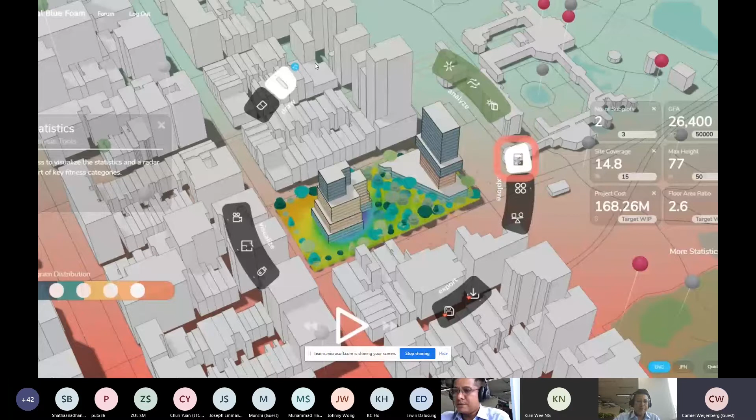Super. So how do we leverage innovation and rethink place and process and face new challenges? So this is one of our core questions in our Digital Blue Foam business: how to embrace innovation and rethink how we work in architecture and building industry design.

So the next 20 years, as most of you know, 2 billion people will be moving to an urban environment. They all need to work, live life, right? So they need to shop, work, do their entertainment, etc. That is a lot of city that needs to be developed. It also needs to be developed in a more sustainable way.

As you all probably know, 39% of global CO2 emissions are coming from the AEC industry, which is ridiculous and it needs to change. We have about 10 years left according to the UN, and the way we are developing now is not a sustainable way yet.

It's not 1982, and some of you might question why 1982. 1982 is when, probably shouldn't mention any names, but certain CAD programs were launched, and they were based on using a mouse and a keyboard to draw lines. We still work like that predominantly in most of the firms.

What we're proposing is to work with a responsive solution that is online and where you can compute solutions based on data. So we rely a lot on what the computer can do, and we rely a lot on what the architect and designer want to do. And so we fuse computer generative design with how people work and design in spaces and cities.

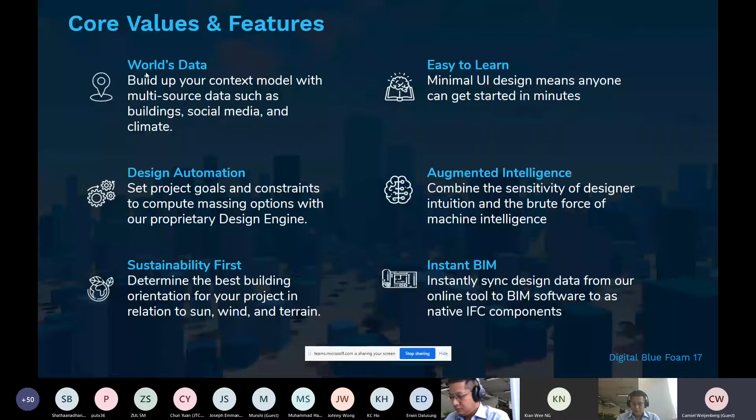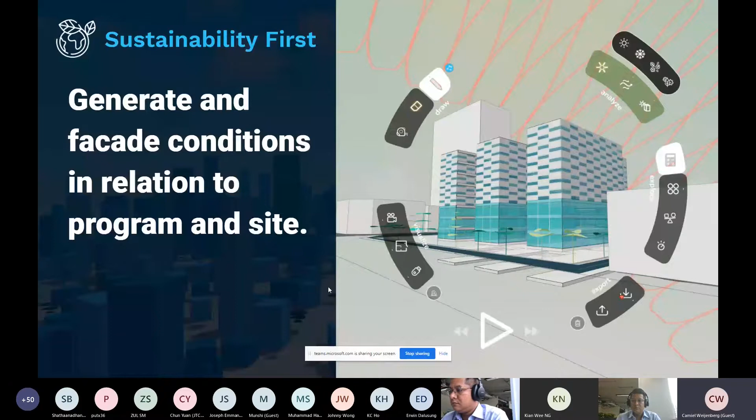So we can also work with external data for some of the sites and locations. And we have a sort of heat map to show where there are very popular restaurants, very popular hotels, etc., to maybe help you determine a certain walkway or entrance point for your building. Again, all we want to do is bring data to the design process and assist designers.

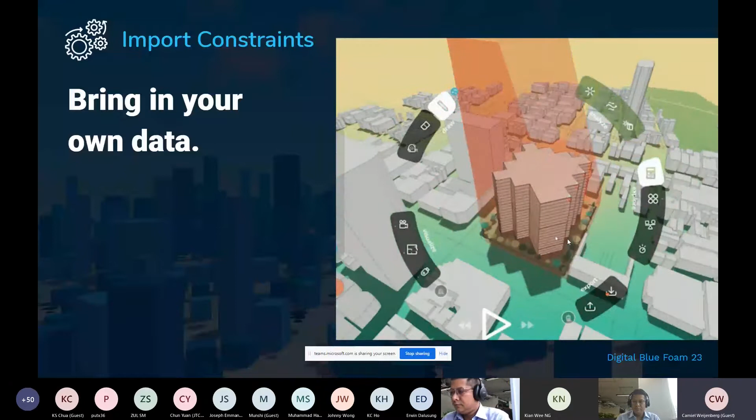We also work with some of the main file exchanges, so you can bring in your own constraints for the site and work with limitations that are based in planning. So you can have a certain setback in an angle or height limitations, and the tool will show immediately if you are in or outside, and you can therefore make instant adjustments to your building, and that will reflect in your GFA and all the Excel sheets that come out of that.

So one thing we're really proud of is this pen tool where you can mark your site and it will draw the buildings, or it will draw a road, and of course different conditions and information can be given to that.

We've got quite a fun, imaginative tool. So on the left you can see this sort of beatbox mixing for your music station, and this was actually an input from one of our clients, and we've taken this challenge on, and we made this mixing board where you see these different shapes of squares, the C, and these different letters. So these can be marked on the site. It will populate the site according to your GFA and which typology you highlight.

You can then offset the building, and you can offset cantilevers in terms of shifting the building or having a side offset. So it's quite a fun and intuitive way of exploring different types of building typologies for your site, and maybe to discuss with your client or just with your team and see what you think is a potential solution.

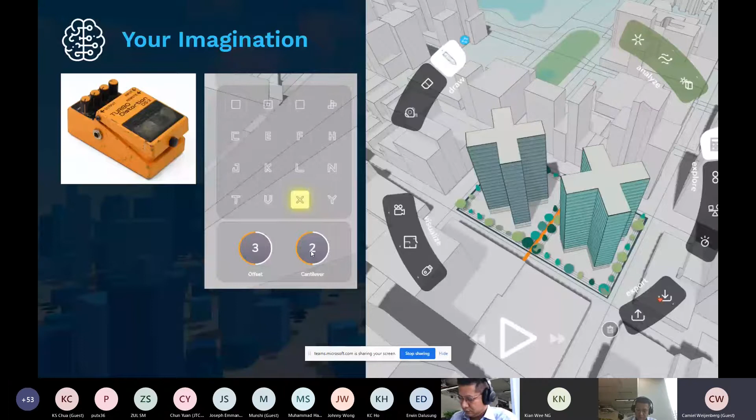Like I mentioned earlier, we've built a pipeline to existing workflows. So we're very strong in these programs where we build an Excel sheet directly from our tool that you can download. You can go to SketchUp. You can, of course, go to Rhino, and you can also go to Grasshopper, but not necessary. And you can go directly to ArchiCAD. Inside our tool is a way that you can test your site and show different types of options and compare them on different efficiencies or what kind of program you have in the site.

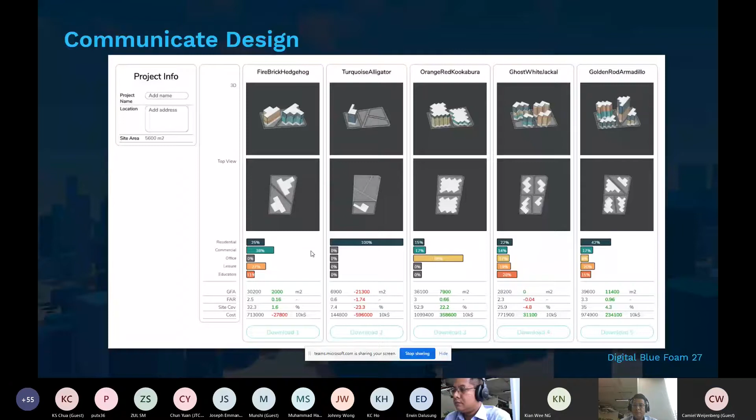Hi, Camiel. We can't seem to hear you. You need to unmute. Is that since the beginning? No, no. Just now? Yeah. You can continue. Okay. Shall I go back a little bit? No, from the ArchiCAD. Yeah, okay, great.

Great. So here in the middle of the screen, you can see the online platform, and on the right, you can see ArchiCAD, and it's syncing the data instantly to ArchiCAD. And these are native components. So floor slab is actually floor slab, facade is facade, etc. So you can manipulate directly. You do not have to redraw it.

You can if you want, of course, but you don't have to. And if you want to try a different option and bring that into ArchiCAD, you can resync it and it will come in again. You can just see it rebuilding the model. And there you go again.

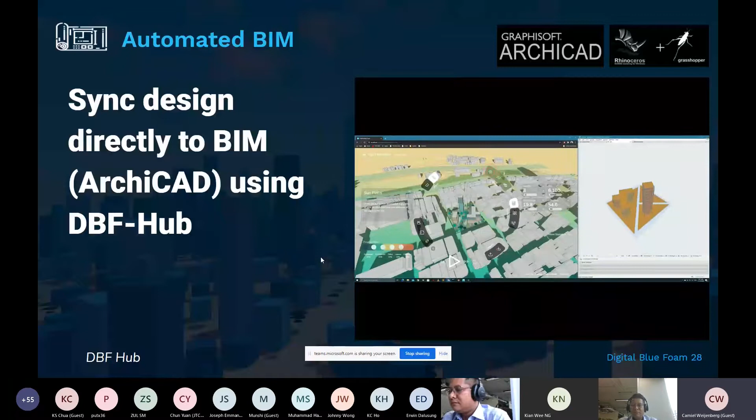So what we're really trying to do is make the design process obviously a lot more fast, but also well informed. So people make decisions on data and can quickly test these with their team and just see how that can evolve for the site.

So we have a very hands-on way of working with our clients. We have clients in an enterprise account where we work with them in a very agile way of developing the tool further. So we really sit down with the team and say, okay, we have a really big bottleneck in how we work here. How can we address that, and how can we make that easier with Digital Blue Foam?

And therefore, we adapt and validate very quickly in a 2-week cycle. So it's not every year or every 2 years that there's an update. There's typically an update in our software every 2 weeks to 4 weeks, depending on what we are launching next, of course.

So I'll do a short demonstration. I had it open, but let me check. Yeah, there we go. So this is our landing page after you've logged in, and you can just type in a location and click enter. Maybe here is quite a good site. So I'm on my laptop. Okay, so let's click on this site.

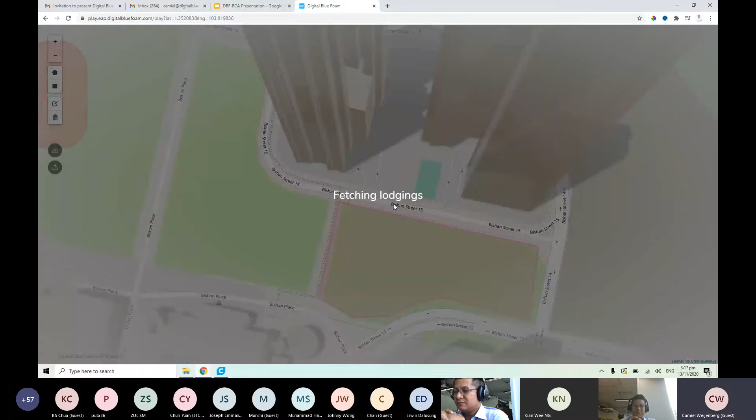And actually I want to edit it a little bit. So I'll just go edit. I change it maybe a little bit, and maybe I want to move this one out. So I say, okay, let's confirm. Let's save that. And it will load the site. So we start bringing all this data into our native environment. Here you can see it's a top view of the site and it has built this in a 3D environment.

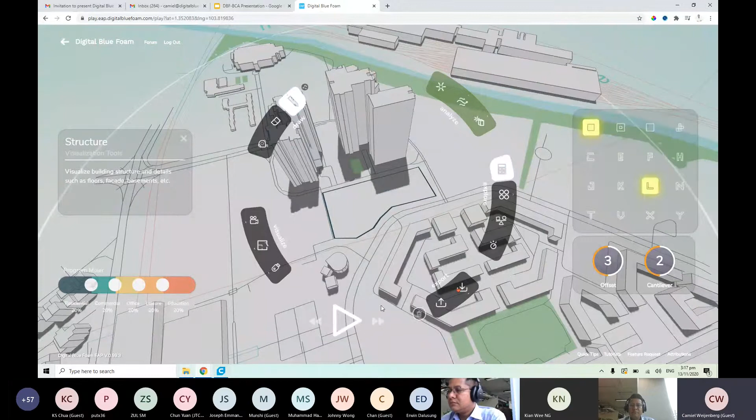And you can say, well, maybe we want something quite high and dense, just like our neighboring buildings. I want to keep it very simple. I just want to have some straight blocks, maybe an L shape. I'm okay with the offset, and then I just click run. And for now, I'll just take a nominal area of the site.

And actually there's a little road across, so maybe I want to draw through that, right? And maybe another one just here. And then I click check again how that comes out. Maybe make this 6. And then we'll start to generate more options from that.

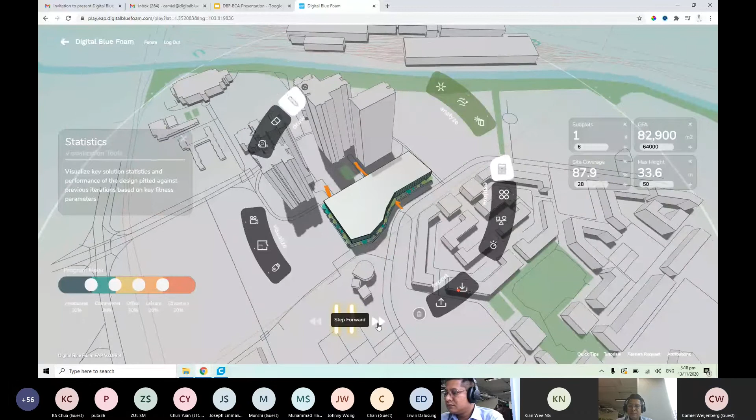Right. It is doing it. I'm not entirely sure why it's so slow. Maybe because I'm in a call at the same time.

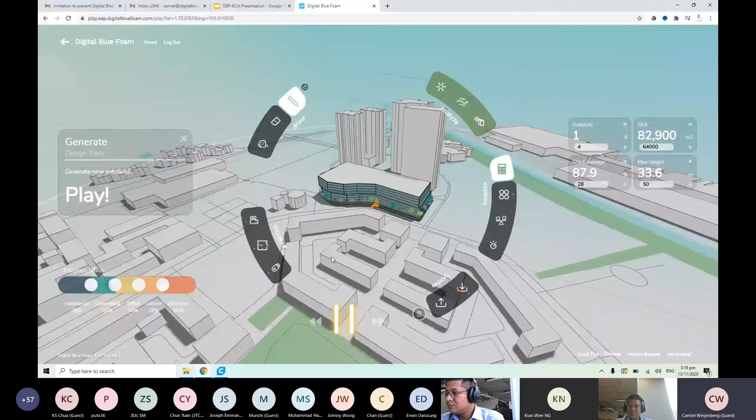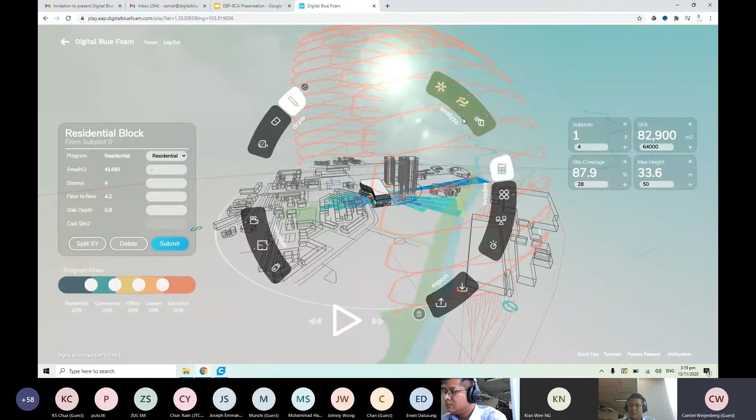Maybe I'll stop that. As you see, it's quite a large site, but maybe I'll just show you how these wind directions work. So here we can see how that wind comes through on a 10-year average. You can also see how the sun develops. In Singapore, of course, it's quite vertical year-round. But if you go more to the northern or southern hemisphere, it's much more angular, and you can work out your shadow casting from that.

And of course, if you click on the sun, you can change these dates quite simply. So if you want to go to January, it will update that and it'll run again. So let me just try this site again.

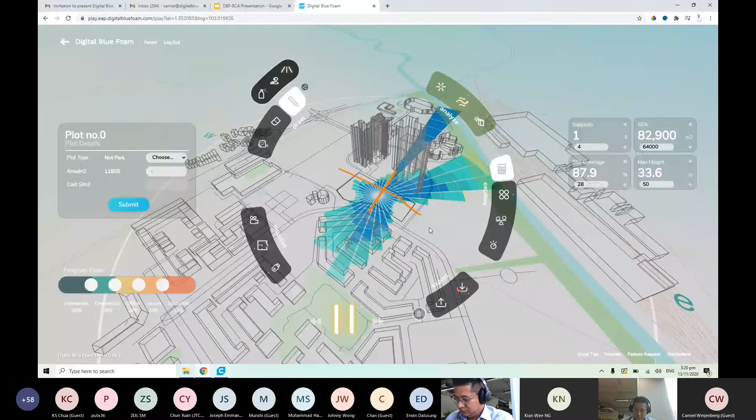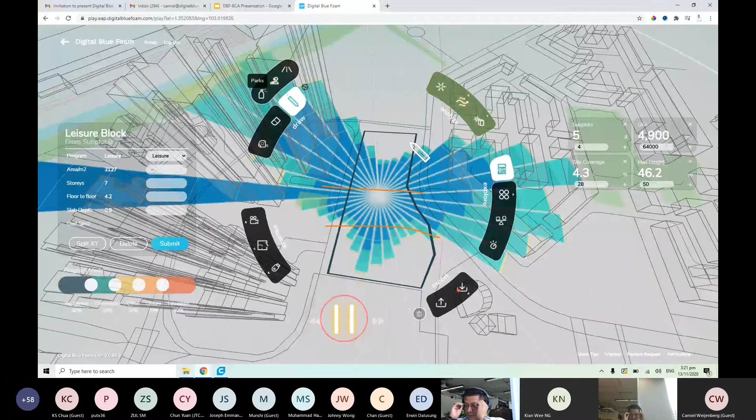So you see it starts splitting the buildings, and actually you can then just save your options. Maybe try more. Actually, I don't think this line is very successful, so maybe I'll just remove that. Maybe you want to try another one, right? Let's say you want to have more in this direction. And maybe I want to have a park there. So we'll generate accordingly. So you see, maybe you want to save this one as well.

I quite like that. So it's a very playful tool, and so maybe I want to have this one, I want this building a lot higher. So instead of maybe 2, I make it 15 stories, and I make it residential. I can change the floor height to 3.8, submit. Oh, I clicked plus by accident. So actually

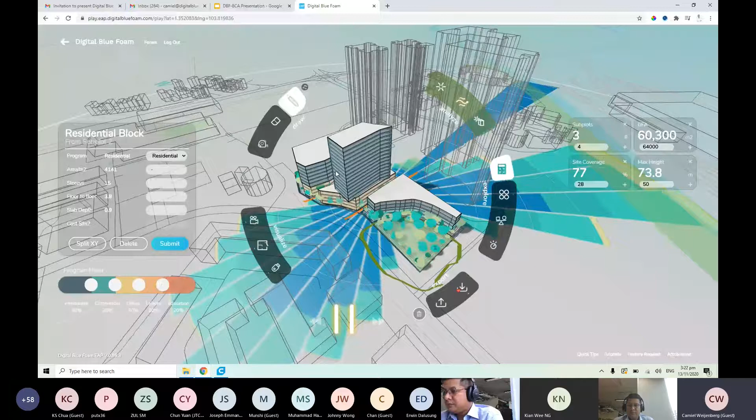with your arrows, you can rotate the block, or you can scale it. And you can rotate it with left and right. And so maybe I want to save this one as well. So maybe if you tried a couple of options, I'm going to shift this one a little bit in. Maybe I want this to be leisure, and on a very high floor to ceiling. So I would like to save that.

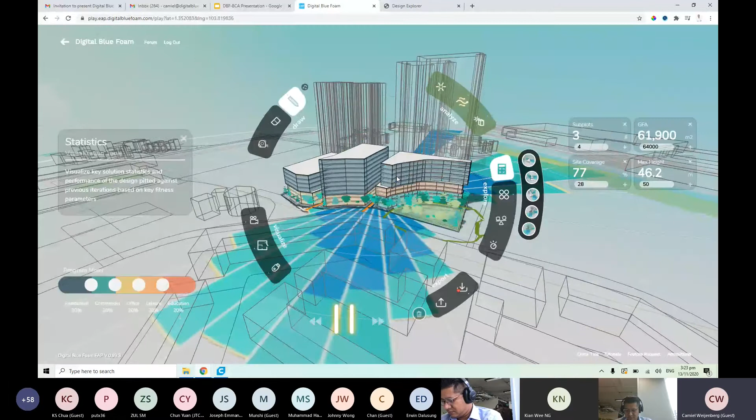So then once you have these, you can say, okay, you've got 5 options. I maybe want to have a quick compare of how they're performing and what areas are in them. So here you can see that these are the typical sites that you've just created. And from there on, you can go back to the tool maybe, and you can manipulate them further. So you can just click on them and it will reset it. So you can maybe make this 7 stories and submit.

So we tried to create a very intuitive tool, and then here you can see the download buttons and upload buttons, and synchronization if you have ArchiCAD open. And then here's some options for turning on trees, and here's some drawings of plan sections and all that you can derive from the site. And then here are some layers and urban information that you can turn on. That is nice to see here.

Yeah, sorry, my internet connection seems a bit slow with the meeting on at the same time.

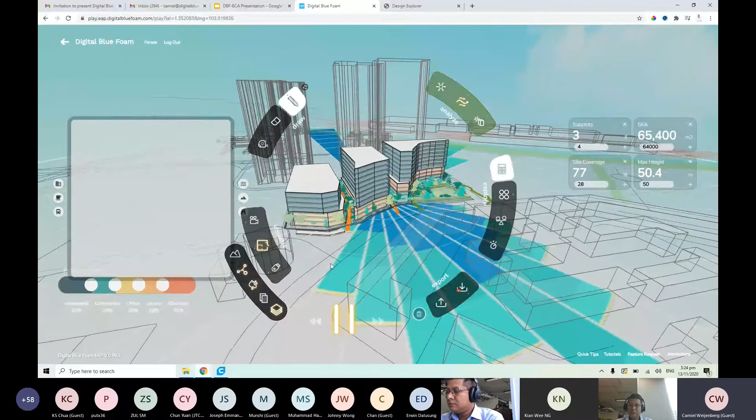But I think that gives a very good overview of what we're doing. And again, we always look for feedback from customers and improving, but we're very confident in this tool.

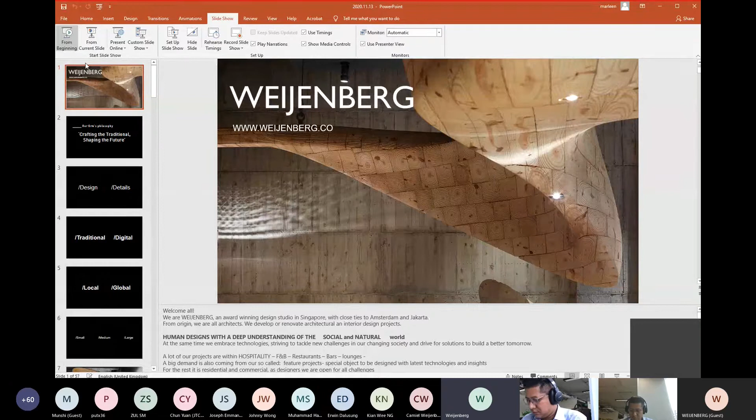Okay. Right. You may start. Welcome all. Thank you. Go ahead.

Crafting the traditional, shaping the future is our firm's philosophy. And this means a lot. It captures almost everything what we like to be, what we like to carry out. Without a past, there's no future. Without a past, we can't invent a future. We need our knowledge from the past to develop the future. The past gives meaning to the future, socially and emotionally, which is a very important aspect. So we should never neglect the past, since then the future would be empty. And so we can go on and on.

Design is more than shapes and forms. It's more than a choice of just materials and structures. Design is about what we think is about being a change maker. We're striving to get the best out of people. We try to create a space that enhances us as human beings, where we live and where we work the best. It gets the best out of us.

Design can evoke interaction, it can evoke imagination, it can be critical. So design is way more than just some nice colors and some nice material all put together. I think as designers we should, and we are almost obliged, to help this world to a better future. Of course, details are incredibly important and show the way we care about our design and about everything.

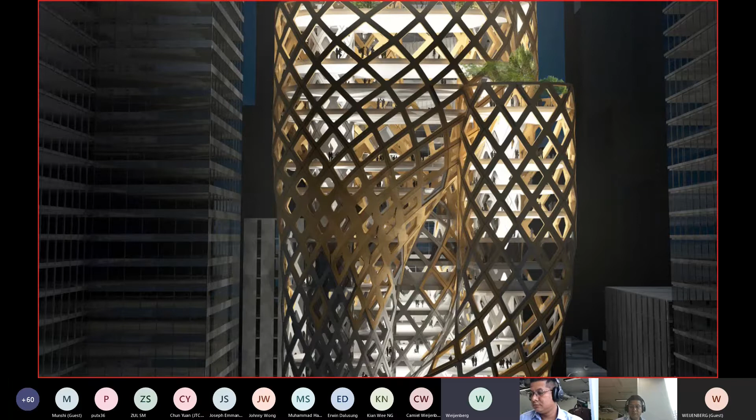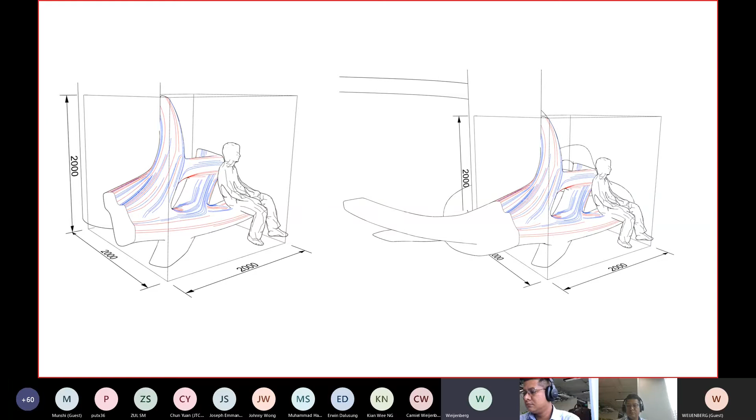Because this location is on the 15th floor, if I'm not wrong, we have to think about how to bring this object up. So we make the object in parts. We slice it so it fits into the lift. And this is the small detail that we try to focus on. Also, this is brass inlay on the wood. You see here how two parts are joined together.

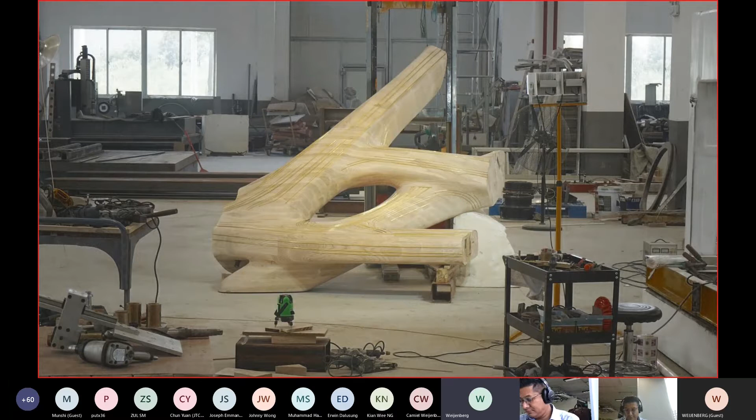How this works, basically, we glue together small blocks of wood and we CNC, and after that smoothing with robotic arms and manual workers. This is one of the parts in the workshop before installing. This is also the detail. From the block of wood, we also try to manage the exact location for the inlay that you see here, and then put all of the information to the fabrication, and they will fabricate it.

As I mentioned before, the idea is to capture the flow of the wind and how the money comes and goes. So we also design the floor inlay layout. Each floor has a really different pattern. So we try to design that. We try to help the fabricator to fabricate this with the exact design.

After finishing that project, the clients were very happy and they asked us to also design another office in Hong Kong. This is in Bank of China. The rent price is so high, and they want the project all done in at most 3 months. So we were really going at a fast pace. We design and send to the workshop, and then they give us feedback. So this is really back and forth design and refinement.

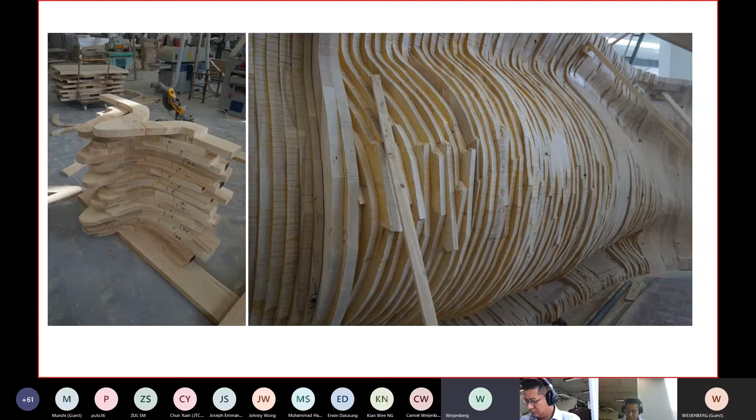As Marleen mentioned before, we try to combine the traditional and the future. So we use wood as the main element in this office. The idea is using strip wood. We only do simple CNC on parts and glue them together, and after that we smooth it. These come in small parts, like 2 meters high and only 1 meter wide, and then they are joined together on site. This sample shows how they use the robotic arm.

So we also think of the walls not only as a division between one room and the other, but how to integrate them with the furniture like seating and so on and so forth.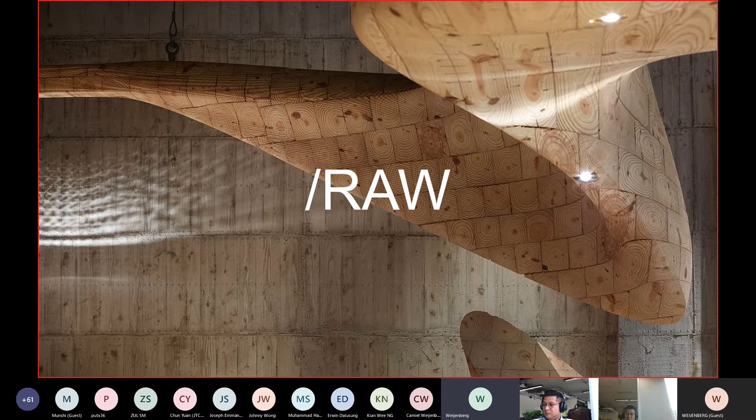Another project that we did here is RAW. It's from Michelin chef Andre. So we think about how to design the restaurant without partition walls. We think about a wooden ribbon driving the diners from the entrance to the inside to enjoy the food. We translate Chef Andre's cooking philosophy with subtle diffusion using CNC technology, and we try to optimize the wood quantity and waste. So there's a lot of digital technology used here.

Before doing a big mock-up, we try to see the possibilities from 3D printing, because we can see the overall shape, we can see the limitations, and we can imagine how it looks.

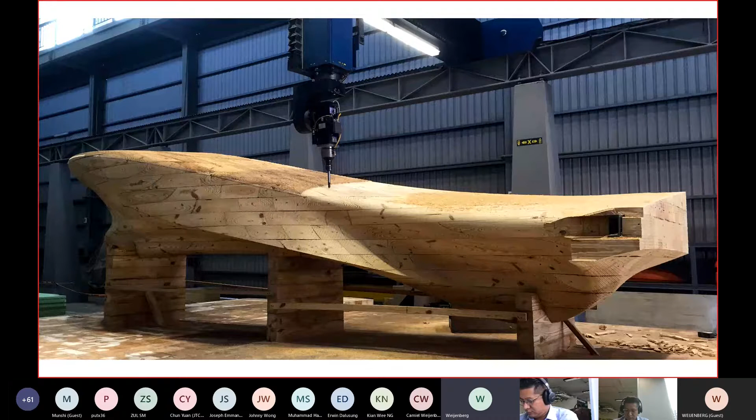So here that shape comes from small blocks of wood. I think there are 3 to 5 types of wood glued together, and after that just smoothing using a 5-axis CNC. I'll show you the video. Here we use evolutionary optimization to get the minimum amount of wood. This is how the sequence should go.

We also think about how to transport it from the workshop to the restaurant and how to install it. So all of the information is embedded in one file, and we share it with the workshop.

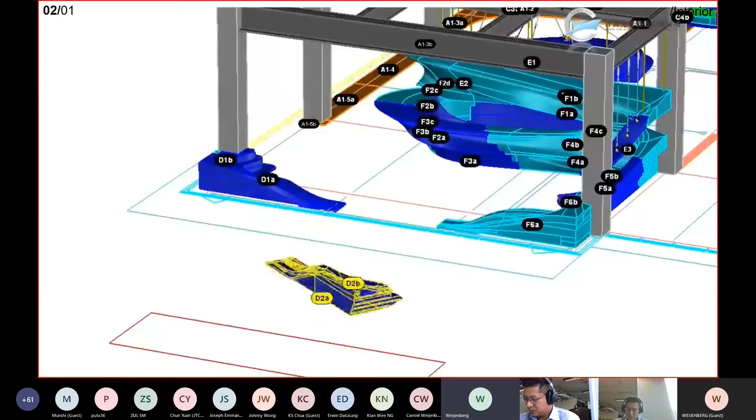Yeah, this is how the inside looks. Okay, so in Weijenberg, we have a design think tank. It's called Veryasian. Basically, we're driven by curiosity. We try to develop our own research projects through collaboration with universities and other knowledge institutions, both in Singapore or worldwide. I'll just show you a few samples.

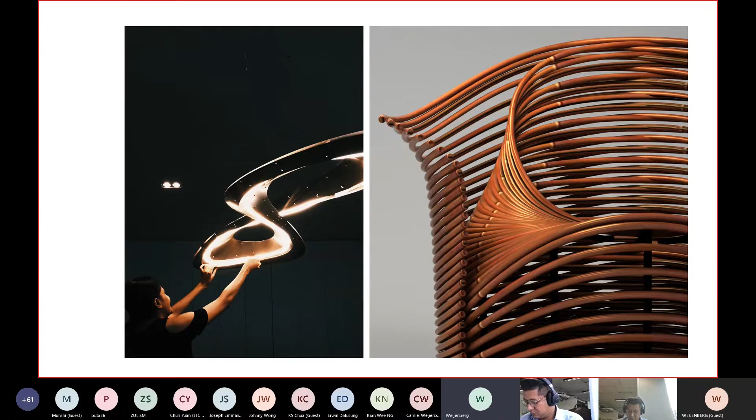Like here, this is mainly for small objects, but a bit complicated in terms of fabrication. On the left, we use metal bending to create continuous 8-shaped lights, and then on the right we use bamboo, and we bend the bamboo to produce a chair. And this is also the same technique as you saw on the RAW project, with small block wood, and then we CNC it.

This one is a research project. We collaborate with SUTD. We got a grant from NAMIC. Here we try to 3D print a sound absorber. First we test what the relation is between form and shape and the sound. Are there any differences between 2D and 3D shapes? From that we get so many variations, like 1,000 more. And then we can see the effect of different shapes on different frequencies.

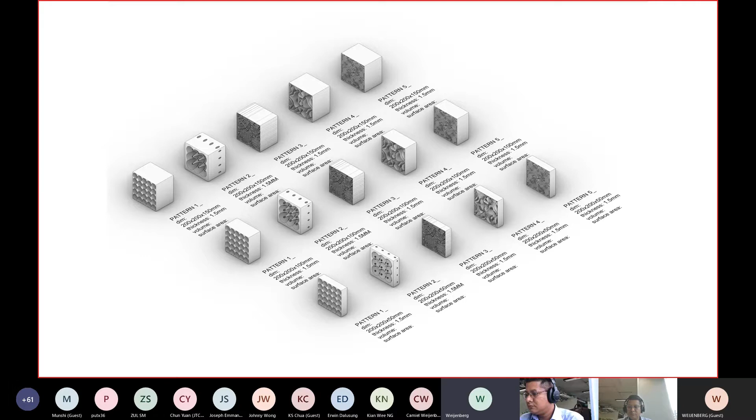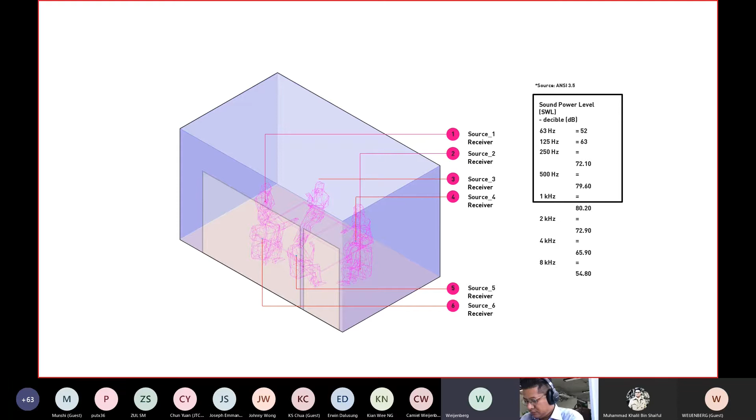So in this research, we do both physical experiments and digital experiments. And then we try to see what the difference is, whether the result is correct or not. Here, we do the digital simulation. We use Grasshopper here. So we put all of the information, like material information, in here. And then we test using the 2 techniques to understand how the sound behaves in the meeting room.

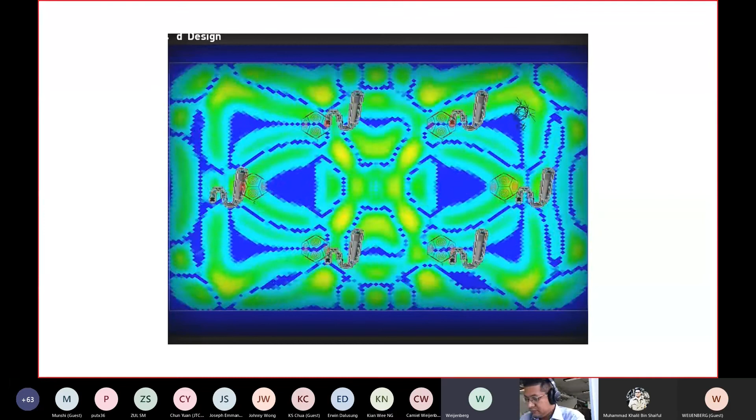We think about what happens if in one small meeting room there are 6 people speaking together, and how the sound wave behaves. And then we do another simulation using ray tracing. We make a base surface, subdivide it and do a ray path simulation. From that we can see which area gets the maximum ray tracing, and then we can eliminate the rest.

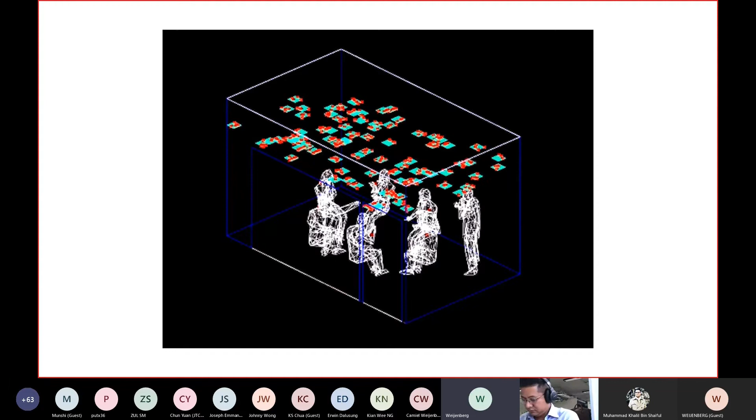So here we test it, and the simulation runs for more than 1 day, and we got 10,000 options, and we choose based on the criteria. Yeah, I think that's all from me.

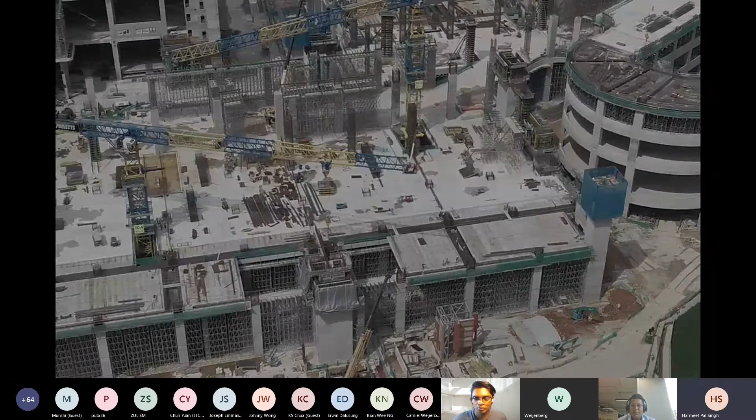So we have incorporated a digital model into design, into construction. Right. Bear with me, it's a bit slow. I think there's some issue with the connectivity.

Operations. Implementation: we use the digital model for design and implementation on most of our projects.

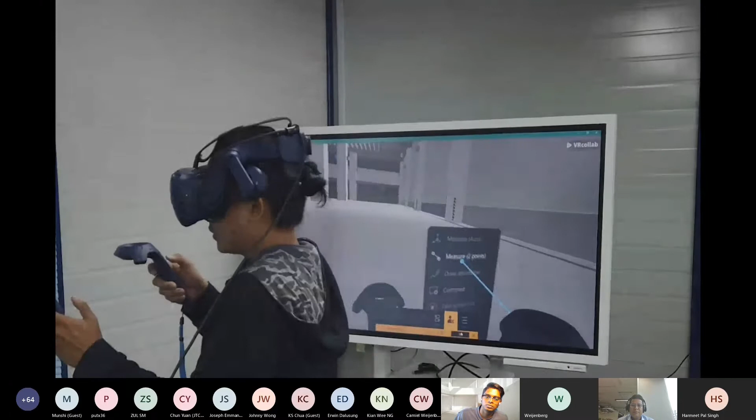This is a virtual walkthrough. We do a lot of collaboration with digital model, and we identify issues, we track those issues within the digital environment itself. We use all those data for analytics. We have a common data environment that we can use collaboratively.

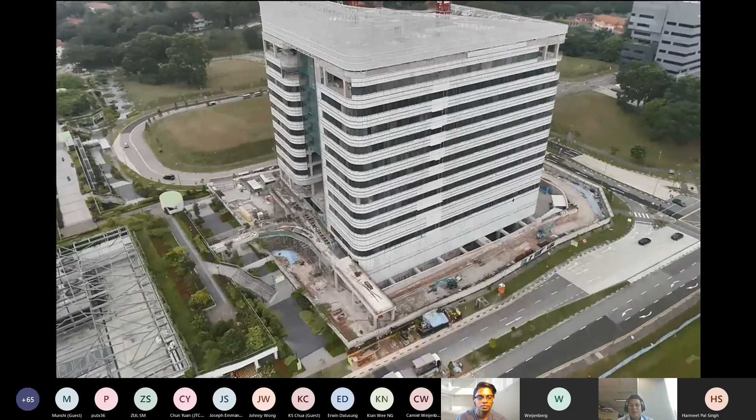AR, VR, right now we are using on most of our projects. Augmented reality allows people to understand and immerse themselves into the design even before it's being constructed. We have drones. We apply drones to collect point cloud files and also progress updates of individual projects during construction. We have laser scanning, right?

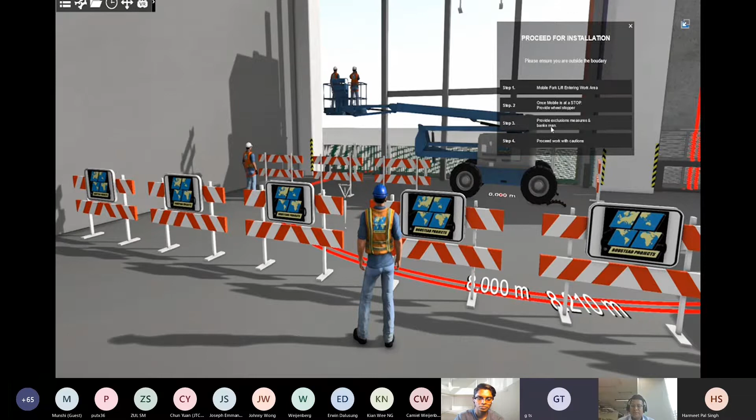And these point cloud files we use to validate with the digital model of the design, or design intent model, that we have. We also apply some lean methodology to our construction, where we integrate some of the cost and time to see if there's any impact to the progress and also to the cost itself. Yep, we have digital precast tracking. We use it for building management, digital model.

Of course, I didn't do this all alone. These are the group of people, the good people that we have in the organization who are helping me with all those implementations. They consist of modelers and BIM coordinators, and they are very young and very hungry for knowledge, if I may say. So I hope this gives you a taste of what we do here in Boustead.

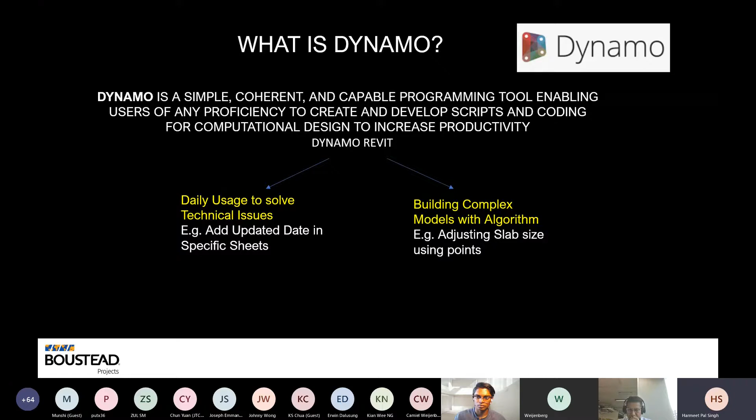As you can see over here, Dynamo is a simple, coherent, and capable programming tool enabling users of any proficiency to create and develop scripts and coding for computational design to increase productivity. We can use it daily to solve technical issues, no matter how small, or we can use it to create complex building models using algorithms.

Okay, so these are some of the use cases that we have in Boustead. We start from simple cutting sections when we're working with CSDs or on plans. We can also use Dynamo to find headroom clearances for authority requirements. We can create sheets from the views that we have created from the sections, or other views. Sometimes we work with MEP, and we can create pipes or other MEP services just by drawing a few lines. We have auto dimensioning, interference checking, fabrication.

Then also we bring data from the field, which we get in the form of Excel or something, back into our BIM, which is in Revit. Then also complex massing. So for this presentation, we are just going to look at four of these: cutting sections, creating sheets from views, interference, and fabrication. So let's start with cutting sections. Okay.

Okay, so basically, the key thing with cutting sections is we are creating many different steps into five smaller steps. So what we're doing is we are going to be just running the script, right? The script goes in and computes all the lines that we have drawn inside. So we just have to draw simple detail lines. Then when we run the script, it will basically

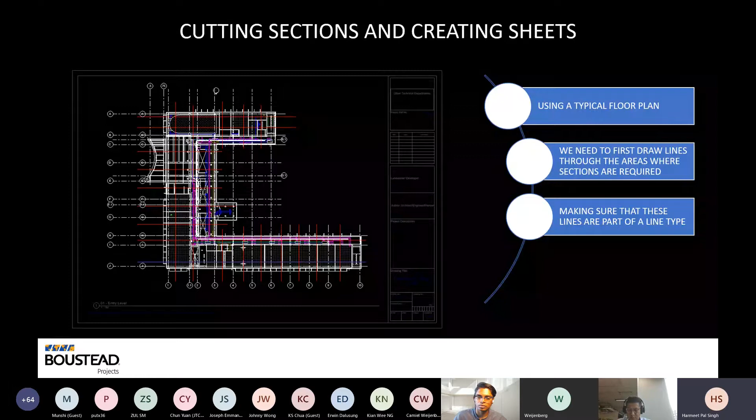Now we have streamlined the process into five steps. The first step is to basically just draw these lines. Once the lines are ready, we can then just run the script. So as you can see over here, it's very simple. Just run the script. Then here we indicate our sheet name. We indicate our sheet numbering. We have a title block family. We also have the issue date of the sheet, checked by, designed by.

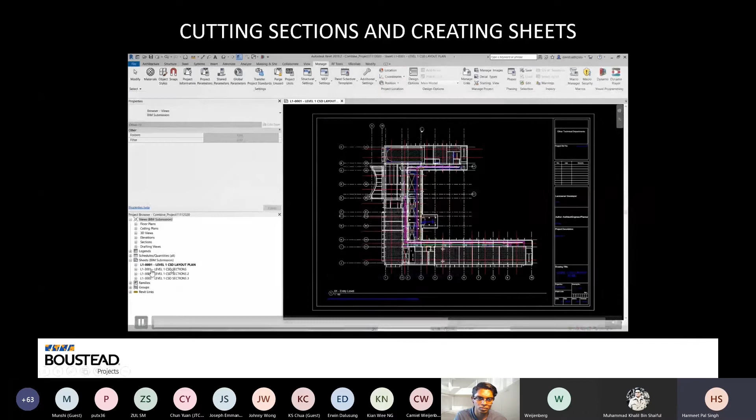We can also place these views on sheets, as well as add templates to these views. So we have streamlined all these processes into just one workflow, which allows multiple users. Now, this particular drawing has about 20 sections that we have cut. So first we choose the view template. Then out of the 20, we choose the first 8, then 6, then 6 again. So we can see on the left over here, we have all our sections created. So we have 8, 6, and 6.

Now, although it creates some level of automation, I have to be honest, the views that come in sometimes do not get placed in the right order. So there is still a bit of moving around that we need to do. But if we look at it in a bigger, very holistic picture, it streamlined a lot of process. We got 20 views into 3 sheets in a matter of minutes.

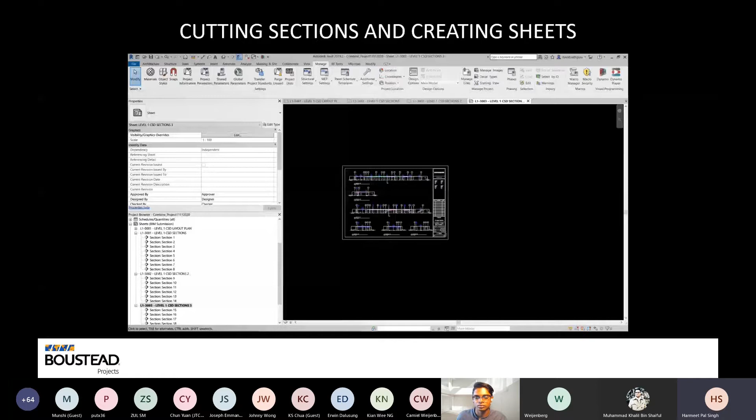And that's what we do in Boustead. We try to optimize productivity, and we are trying to use computational BIM as much as we can in our daily lives. It gives the ability for the BIM modelers and BIM coordinators who have no experience in coding or scripting to come up with all of these easy and fascinating ways to speed up productivity. And that's what BIM is actually supposed to do in the industry, to speed up productivity.

Then using computational BIM, we can actually come up with fabrication. This is what the industry is now moving on to, 3D fabrication, like PBU, or as you can see in the video in the center, modular M&E services. A lot of stakeholders have started looking into this kind of fabrication, where they look at three categories: constructability, fabrication, and installation. With constructability, we look at how the module is to be constructed, and how easy it is for maintenance in the future. How can we get it into a corridor? How can we build a corridor with the modulation inside?

These are the things we use computational BIM to help us analyze and understand. Once the constructability is done, as you can see in the center video, we are showing a corridor with 3D fabricated modulations of MEP services. So now we look at how many services we can divide one corridor into, and that's where we look at fabrication. We take the data that we get from this and send it to our subcontractors to develop the fabrication offsite before they bring it to our site.

Sorry, David. If I may add, again, what we want to share with everyone today is that we apply some kind of design thinking. We understand that there are particular pain points. In this case, David himself has identified some of his pain points, because in the work he's been assigned, with ceilings there's a lot of interference, or we may say a lot of coordination issues that need to be resolved. So today he's going to share with you how it comes back to his own daily work, how it is going to be applied to his daily work. Yeah, David, over to you.

Thank you. Yeah, thank you. Next.

Yeah, so there are two approaches you can normally take, which is through Navisworks, or you can use an external program to run those clashes. When you try both ways, you can achieve what you want. But as a programmer, I would like to come up with just one program, which is Dynamo, available in Revit. So I tried just using Dynamo to generate those clashes and 3D views. Next.

So this is the Dynamo script that I came up with. First things first, you just run the program and it will find for you all the interference checks between those two categories. When those clash detections are shown, you can color them or override the visibility graphics by adding green and red colors to those two elements, which is the same concept I've seen in Navisworks, because they always like to show a clash with two different elements in two different colors. In the end, it generates 3D views separately for each individual clash.

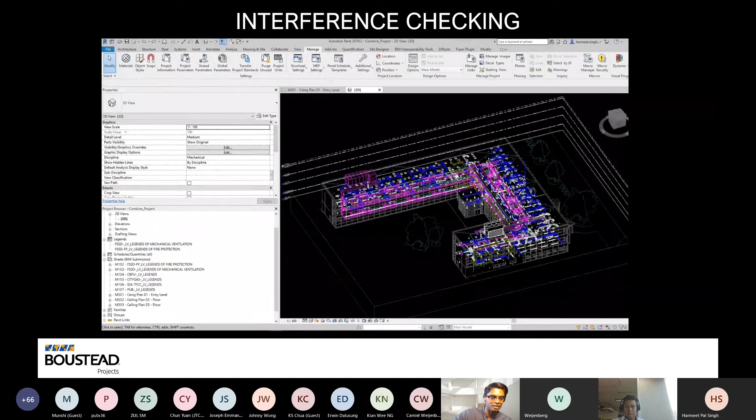Next. So here's the video that shows how this Dynamo Player works. As you can see, there are two categories you can select. In this case, I select ducts and pipes, and the 3D views are generated for each individual clash. From there, once you identify it, you just amend the clash.

To improve this, I thought of adding a parameter that lets the BIM modelers tell the BIM coordinators that this problem has been resolved and is ready for checking. When BIM coordinators know those are already resolved, they can just delete those 3D views. Next.

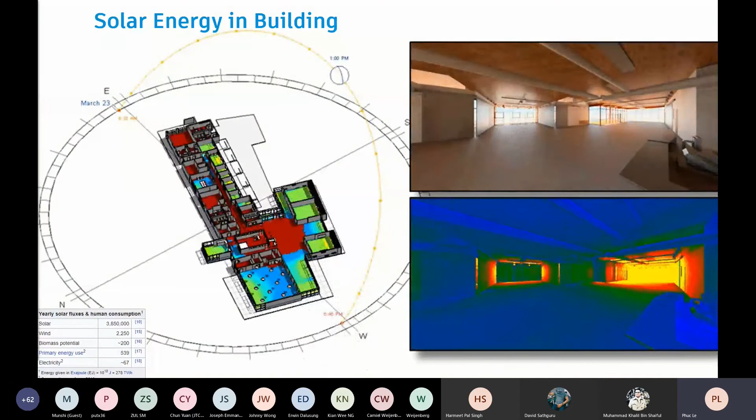And the second is passive solar techniques, including orienting a building to the sun, selecting materials with favorable thermal mass or light-dispersing properties, and designing spaces that naturally circulate air.

One thing to consider is material, such as the insulation, absorber, thermal mass, and distribution. And another important thing to study is the sun path at your location. And do you know the important days to study the sun path? Here are some tips for you. You need to study on particular days. For example, the solstice, to study the extremes of the sun position, or the equinox to study the average sun position. And you need to study in different seasons.

In winter, study how you can maximize the sun to passively heat the building. And in the summer, study how you can minimize the sun to passively cool the building.

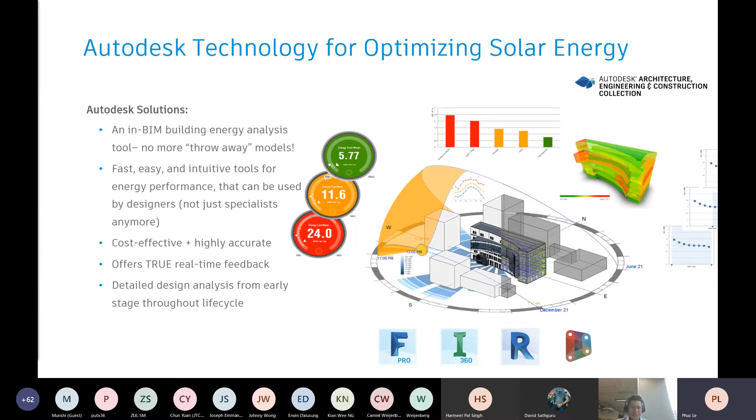And with Insight built into Revit and FormIt Pro, architects can model and simulate multiple options early and throughout the design process, making it easier for an architect to do simulation and evaluate options before too much is baked into the final plan. So by using this tool that we will go through in this session, you can increase productivity, save time and effort on conducting detailed design analysis, and ensure you are meeting your client's needs.

We have two subtopics to be discussed. First, the PV energy of solar photovoltaics, and second is the shading design. Now I'll just quickly show how to set up the Revit model for solar analysis. First, you need to prepare your model and select the 3D view you want to study the sun analysis in, and in the view control bar here, you can see the sun icon and the shadow icon here.

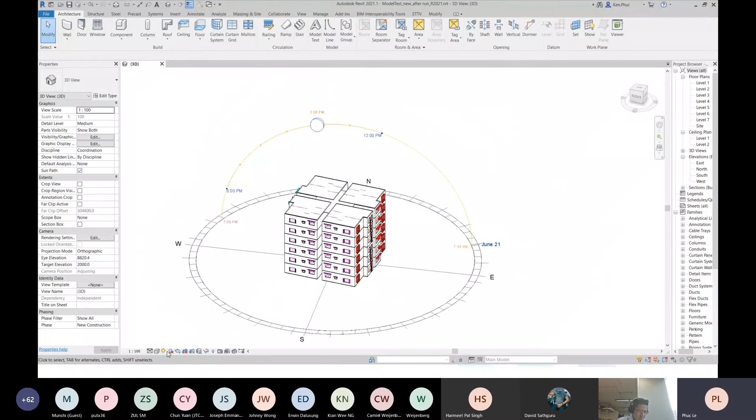And first, you need to set up the sun settings: click the sun button, select sun settings, and the sun settings dialog will appear. You can choose the solar study as you want, then verify the location, click OK, and turn on the sun path here. And finally, to see the shadows, just turn on shadows in the Revit 3D view to visualize, and you can easily change the date. For example, I want to change to September, as well as change the time. So you can see different sun locations and how they impact the building.

Now let's talk about the Insight tool, the Insight solar analysis provided with Revit. You can find it in the Analyze panel, in the energy analysis section. And if you want to use this plugin, you can visit this website to download the plugin for each version of Revit. You can download it for Revit 2016 to 2020, and for Revit 2021, solar analysis and lighting analysis are available, and you can download them in your Autodesk account.

This is a general workflow for evaluating the PV potential of the solar photovoltaic of a building in Revit and Insight. First, you need to verify the project location and sun setting in your model. Then prepare the 3D view for analysis. You need to define the study time and the surfaces.

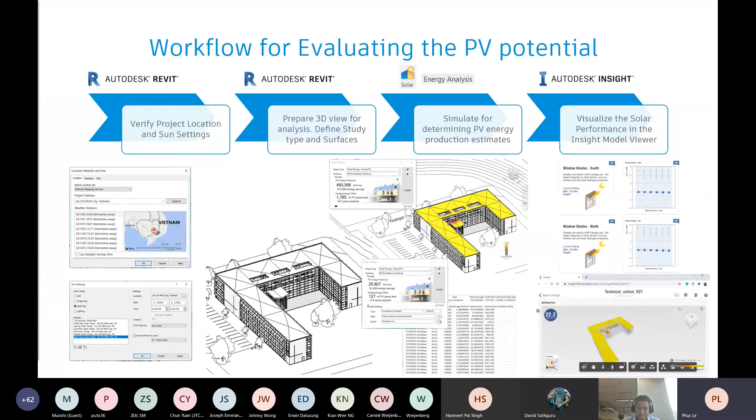For example, in this case, the result will show you the PV energy production is around 493,000 kilowatt hours per year if you use the roof of the building for solar energy, and the result can be extracted to Excel or published to the Insight web page to help you easily visualize it in the web browser.

And another workflow is for determining the solar access. Solar access is a great way to determine if a space achieves enough daylight throughout the day, also referred to as daylight access. Many countries and regions are now requiring new buildings meet a specific solar access standard, such as SEPP 65 in Australia. The workflow is similar to the previous workflow.

You need to verify the project location and define rooms in your Revit model. Then use the lighting tool to set the lighting study setting with solar access with the rule you set. For example, in this case, I want to set the time range from 8 a.m. to 4 p.m. and I want to know how many rooms have a minimum of 3 hours of daylight,

And you can visualize the solar analysis result in any plans, in any 3D views, and in your Revit schedule. And as mentioned earlier, performing solar analysis also considers the shading design. Shading should be considered as an integral part of fenestration system design for buildings in order to balance the daylighting requirement versus the need to reduce solar gains.

The second challenge is determining the shadow and calculating each shaded area. In some countries, for example in Singapore, we have the ETTV, or envelope thermal transfer value, calculation for building design to identify the shading coefficient of the sun shading device. And we have more and more building shadow studies of the neighboring area.

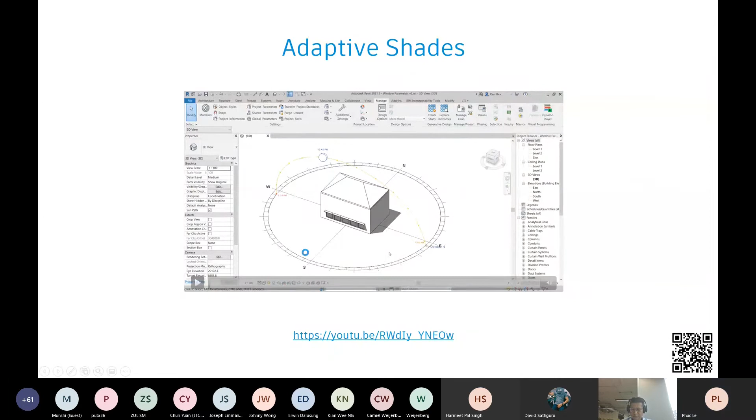Here is a simple video of the adaptive shade. I have the window family with the overhang shade in a simple building. And in this window family, I have some type parameters such as height, width, overhang, and you can see the shade overhang completely shades the window with this solar position. And I use a Dynamo script with some inputs here.

And as you can see, if I change the window height by increasing its value, the Revit family will automatically adjust. And when one shade is not enough to cover the window, it will divide into two shades and then adjust the overhang of the shades. And if the position of the sun changes, meaning the angle of the sun changes, the depth of the overhang of the window will automatically adjust too.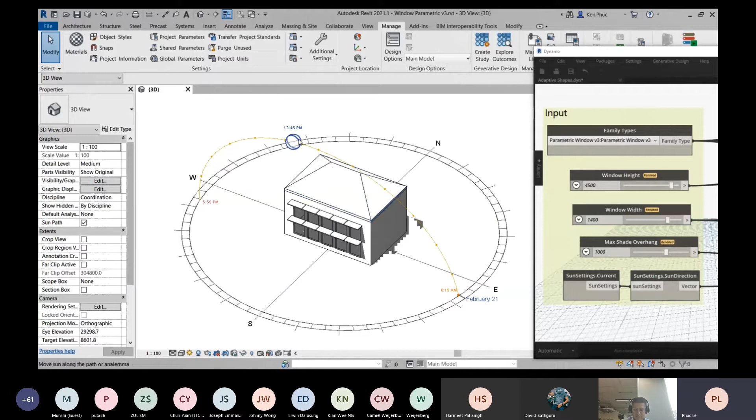Yeah, and you can see at any time of day or year, the shade overhang will completely shade the window with the sun position. So with this Dynamo script, you can use a 3D visual presentation option and relevant shading device. The designer can check the appropriate shading design at different times of day or year.

And so with Revit or any BIM tool, we can visualize the shadows in the sun studies. But as all of you know, the shadow here is not a real element, just for presentation purposes. The next question, I guess, is how to determine the physical shape of the shadow and calculate its area at any daytime or any sun position, at any location of the building.

For example, we have a lot of problems calculating or visualizing the shadow of the building as a real element in Revit, or calculating the shaded area of the window by the shading device. And the following thing I will share with you is the answer. We extend the Revit capability with the power of Dynamo.

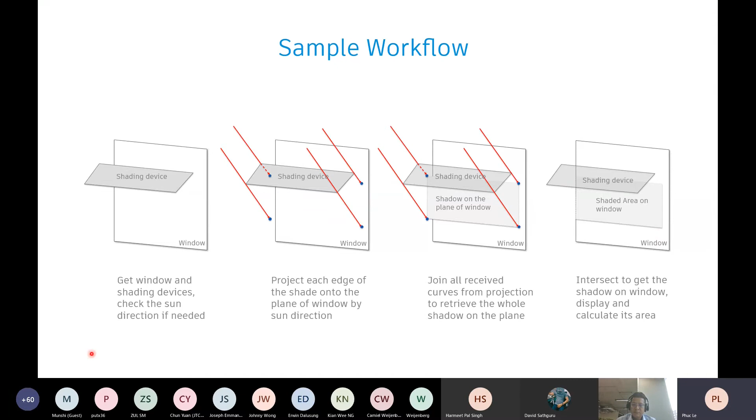And after you get the shading device, you need to capture its geometry and get its edges, and then you project each edge of the shade onto the plane of the window by the sun direction. After that, you join the resulting curves from the projection to retrieve the whole shadow on the plane. And finally, we intersect to get the shadow on the window, display it and calculate its area.

And based on the workflow, here is a simple Dynamo graph to calculate the shadow of a building on the ground. I have three inputs here. The first is the mass of the building. The second input is the ground floor. And the third input is the sun direction of the current view. Based on the mass of the building, I can get its geometry, the surface, the curves, everything.

And then I use the node called Surface.Project to project an input geometry onto a given surface, the ground floor, along a given direction, the sun direction. I get the resulting curves after this projection, and use the nodes PolyCurve.ByJoinedCurves and Surface.ByPatch to create a surface by filling in the interior of a closed boundary defined by the input curves.

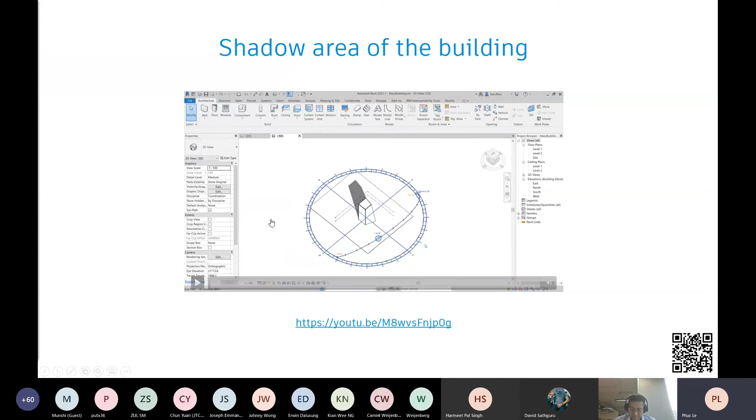And then using the node DirectShape.ByGeometry to create a real element in Revit representing the physical shape of the shadow, and easily calculate its area. The following video will help you have a better look at the workflow I just mentioned. This is the demo video to calculate the shadow of the building.

I have the building in Revit, and as you can see, if I change the daytime, the shadow will change directly. But the shadow here is not a real element. It's just for presentation purposes, and you cannot capture it and cannot calculate its area without Dynamo. And I use the Dynamo Player to run my script.

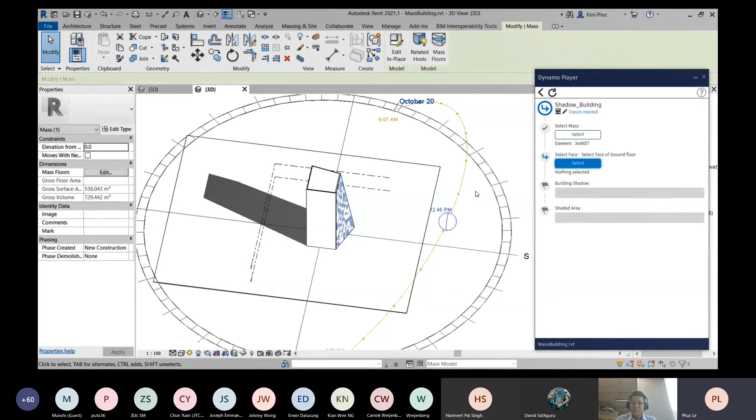I have two inputs here. Select the mass of the building, and the other input is select the ground floor to capture its shadow. Just quickly run it, and in just a moment we can see the result. It will display a real element in the Revit model. This real element represents the shadow of the building, and it also has the property of the shaded area. You can see in the properties here we have the area of the shadow at that time.

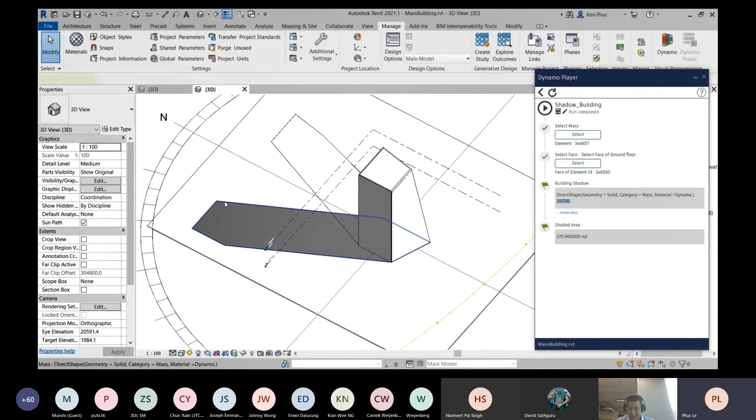Yeah. And one advantage of Dynamo is you can easily adjust the input. In this case I can easily change the daytime and just click the run button again, and it will show the shadow at the new daytime. And the real physical shape of the shadow correctly matches the shadow in the Revit environment.

And another video is using Dynamo for shaded area calculation of the window. This is a simple building. I have multiple windows with multiple shading devices. We have the horizontal shading device, vertical shading device, parallel shading device, or egg-crate shading device, and even a complex or organic shading device. And we can use Dynamo to run a script to show the physical shape of the shadow as well as its area.

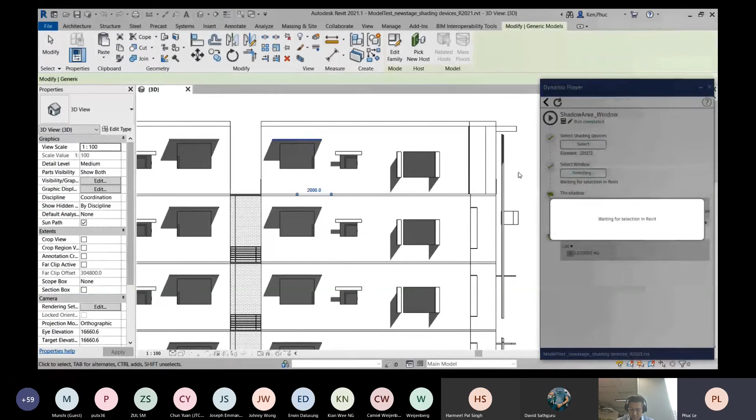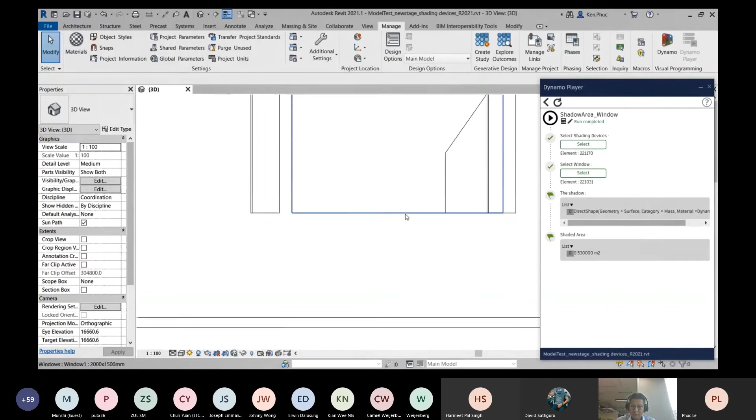In this Dynamo script, I have two inputs. The first is the shading device, and the second is the window you want to calculate its shaded area. And just a moment after you click the run button, you will have the real element representing the shadow of the shading device on this window, and you can easily repeat the procedure with different windows and different shading devices. Yeah, and you can see the shadow here matching with the shadow we can visualize in the Revit 3D view.

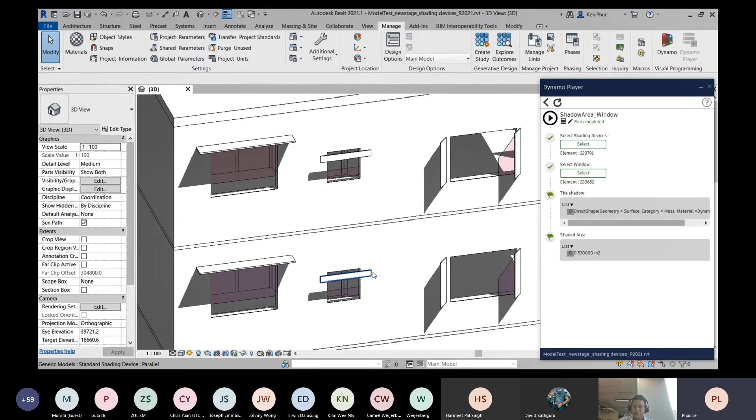Yeah, as you can see in the last two demo videos, Dynamo can do the basic calculation on shaded areas. However, if we use Dynamo to perform the shaded area calculation for an entire building or large building, it would be a very time consuming task. Therefore, we need an advanced solution here, and this is Revit API. API stands for Application Programming Interface, and Autodesk Revit provides a rich and powerful .NET API to unlock the full power to the coder and the end user. And based on the Revit API, we can build an add-in to calculate the shadow area for the host building.

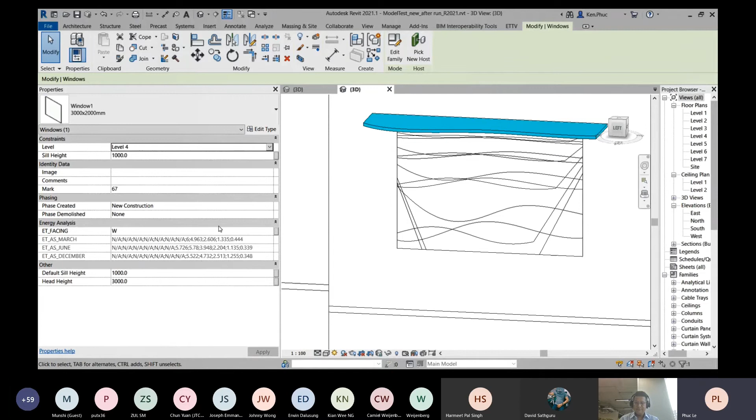And after running the add-in in Revit, we can see a lot of shadow elements. It's the real shadow physical element. It represents the physical shape of the shadow at different daytimes on each window, and we can see the value of the shaded area based on the time frame. And the time frame I set from 7 a.m. to 5 p.m. means each parameter will include 10 values of the shaded area at that time. And this result will help us observe the different shapes during the daytime and extract the maximum, minimum, and average value of shaded area accordingly.

And next step, the calculated shaded area can be scheduled and reported, and this will aid the design process in later stages. For example, to calculate the ETTV value of the room for sustainable design.

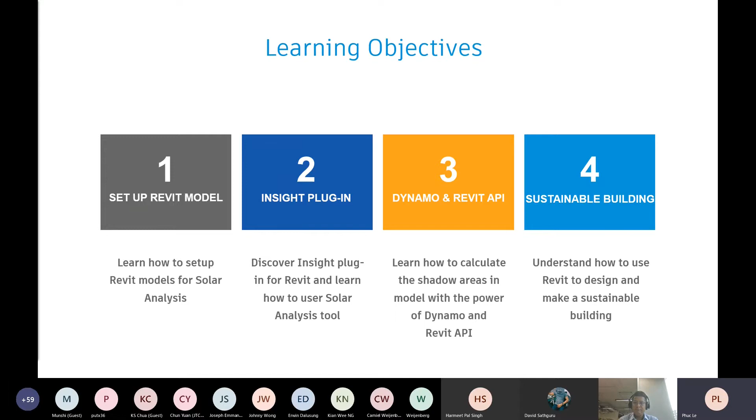That concludes my presentation, and I would like to quickly summarize the main points or takeaways. First, you learn how to set up the Revit models for solar analysis, and next you can discover the Insight plugin for Revit and learn how to use the solar analysis tool. And then we learn how to calculate the shadow areas in the model and show the physical shape of the shadow with the power of Dynamo and Revit API. And finally, we understand how to use Revit to design and make a sustainable building. And so we can do more with better outcomes and less impact to nature.